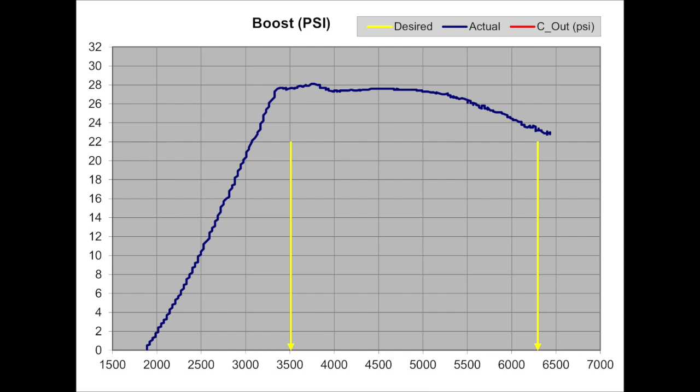So those are the software versions that I've put on my Mk7 GTI, and the data I've collected has been on the street - full throttle acceleration in third gear, starting around 2,000 to 2,500 RPM up to around 6,000 to 6,500. Recording engine variables like air-to-fuel ratio, timing, boost, and the vehicle's acceleration time, then using that information along with vehicle speed to calculate peak wheel horsepower using the virtual dyno application.

A couple things as far as the procedures go - I have a link explaining some of my use with virtual dyno. This go around, with the number of tunes I've used, I also did a comparison with the DynoJet when I recorded data there and found a really high correlation between the two.

As far as the street data goes and the amount of data I've been recording there, I did a short analysis to make sure I was getting sufficient data to be able to make a fairly conclusive comparison between these products.

So it wasn't just one pull on the street compared with another one. I ran enough to determine that for the threshold of difference I was interested in, which was a peak wheel horsepower of 7 wheel horsepower, at least 6 samples of each tune would be necessary.

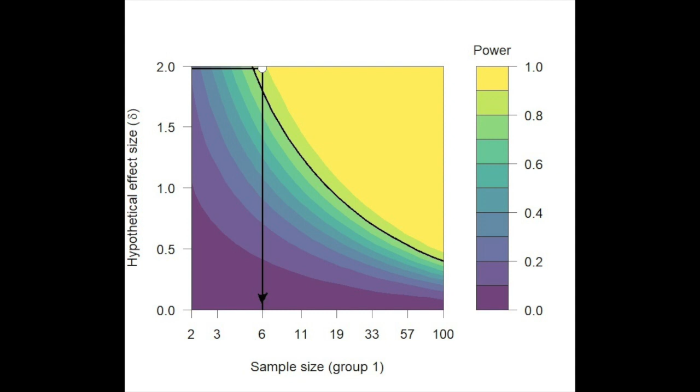I went well above that. I think the minimum I had was around a dozen, and for a couple of these tunes I've got about 20 plus pulls that I've done. Didn't use every single one of them, but that got enough to get some good data.

And then the one other thing I address in a separate section is some software I'm using that allows me to log variables from the engine that aren't accessible with the Cobb Accessport. That's the noise signal, the average noise level, which is basically just a moving average of the noise signal, and then the knock threshold, which is based on that moving average.

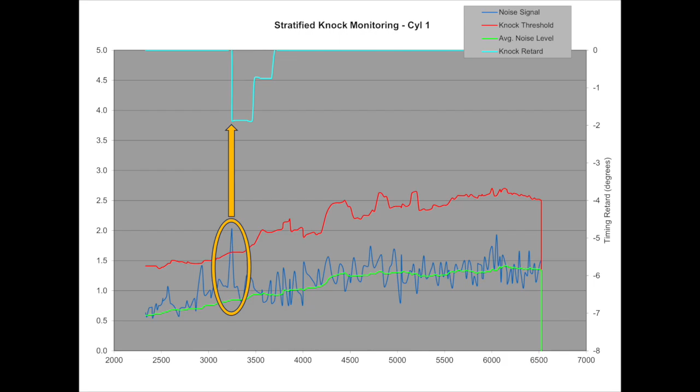It's multiplied by a gain factor and has an offset applied to it, and that determines this threshold. If the noise signal goes above that threshold, that's where the ECU determines a potential knock event has occurred and starts to take preventative measures to keep the engine safe.

That's something I've described on a separate page and would be worth your while to look at, because it's pretty insightful as far as the approach some tuners use to deliver the power you see, and the perception of what is safe and what's not.

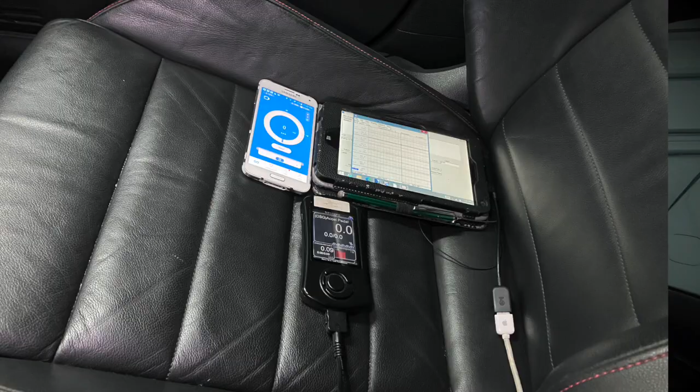So that's the background. As far as capturing the data, like I said, I successfully did that. It took several weeks to get through all the different tunes, getting enough data, having the right temperature conditions to keep things fair and even across the different tunes, making sure the temperatures were the same.

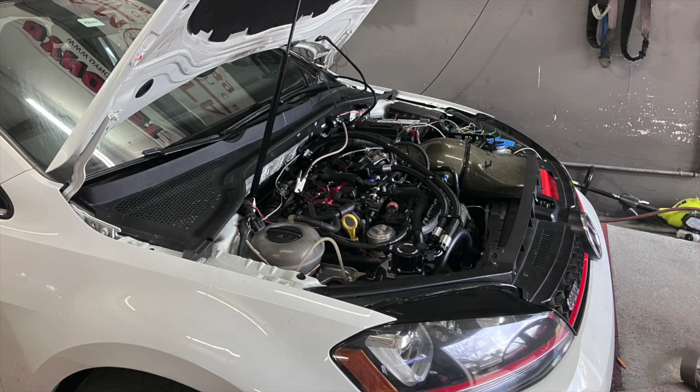On the dyno, that was all done in one day, a couple of hours, and temperatures stayed consistent that day. So that was a very successful dyno session.

All this information is contained on pages linked below. I've got one page set up with the individual tunes, the pulls I've done, and a sampling of how the variables like AFR, boost, etc. looked on multiple pulls for that particular tune.

I didn't put every single one of them because when you get like 20 different pulls, it just starts to become a mess of lines. So just enough to give a sense of that. I did that for each one, along with the DynoJet, or rather virtual Dyno estimated numbers.

There's another page that's got street data. That page contains all those individual tunes, their results aggregated into an average, and then comparing them - so you've got tune X compared with tune Y and tune Z, all on the same chart, showing the average value.

The intent there is to show trends between these tunes, just in general what you can expect from them. And there's also the estimates for the peak wheel horsepower, the acceleration times, etc., that type of stuff.

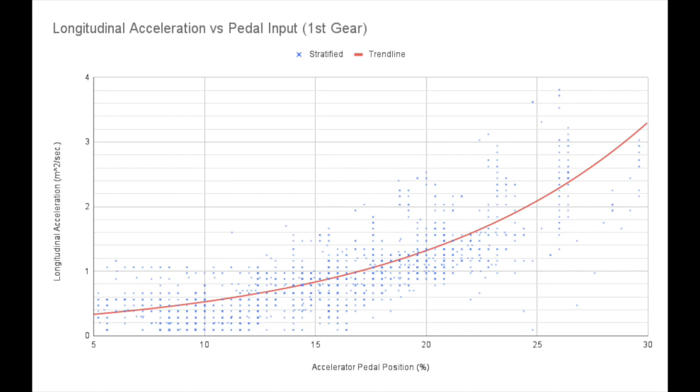There's also longitudinal acceleration, which is how rapidly the vehicle's accelerating. I've logged that versus the pedal position to give a sense of throttle response, how far you push the pedal, how much the car is accelerating, to show that for some of the different tunes, how that may compare. I only did that in first and second gear. I think at the higher gears, it's not as noticeable, so I just limited it to those two.

And then as far as the dyno goes, that's pretty straightforward. You get wheel horsepower and wheel torque, not much else to get from that.

With respect to the actual results, I think looking at the data is probably the best course, but I will go over it just to describe it. I think the intent of capturing this data was to allow people to make up their own mind about what seemed most suitable to them and what they liked. But I'll go ahead and give my thoughts on some of the things that I saw that maybe I wasn't expecting, things that confirmed things that I had suspicions about, etc., that type of stuff.

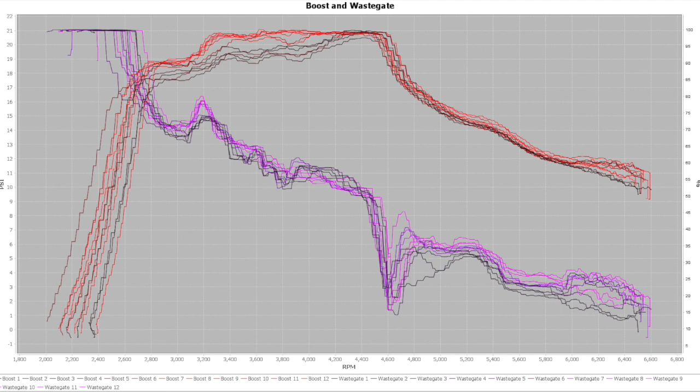So starting off with the stock tune, no real surprises there. Moderate power. I was a little bit surprised at how quickly the boost pressure drops off after around 4,000, 4,500 RPM. It really just plummets, which was slightly surprising to me. But aside from that, most of the rest of the stuff I saw from it was not all unexpected at all.

The Cobb Stage 2 tune was one that I really enjoyed getting the opportunity to log and compare those results with both stock as well as some of the popular aftermarket tunes, because the Cobb software has a pretty bad rap as far as I can tell.

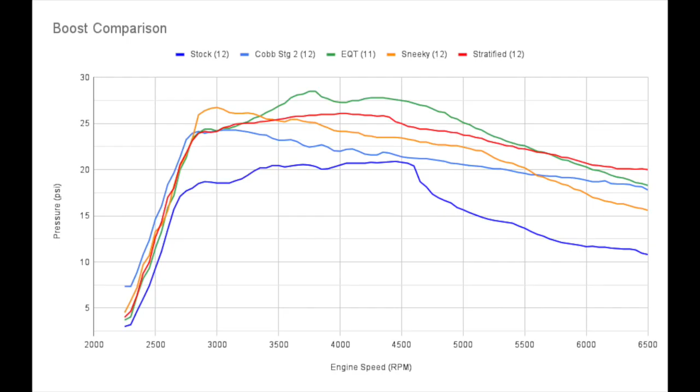And when you look at it from the perspective of what it is doing and what it delivers, I don't think it's deserved. In terms of power output, it is less than these aftermarket tunes, which is hardly surprising when you take a look at the boost curve. You see it dropping rapidly. Look at the timing. I think it has the least aggressive timing of any of the tunes out there.

And so when you see those types of things, then you hear it talked about as being trash and dangerous, going to ruin your engine if you use the Cobb tune. And you look at that and you say, okay, how's that happening when it's running relatively low boost and low timing?

That just doesn't add up. And then you throw in the new variable, which is the noise signal, noise level, thresholds, and all that. And you see that Cobb is running OEM safety measures. If you're talking safe, that's pretty much as safe as it's going to get. It's using what Volkswagen's built for this car.

And so this gets to that issue that I bring up with the Cobb Accessport reporting knock retard, which is very misleading, or potentially misleading, as I put it, because the knock value that the sensor is reading is processed prior to determining what the ignition retard is going to be. And that processing is subject to manipulation by software tuners.

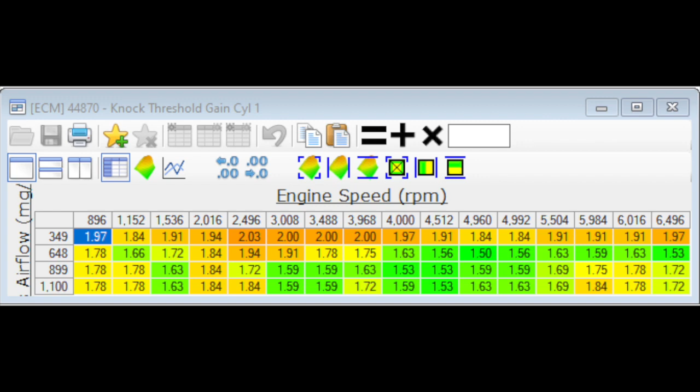So what you get for a knock retard value depends a lot on what the software tuner has done with values in the different tables that they can modify.

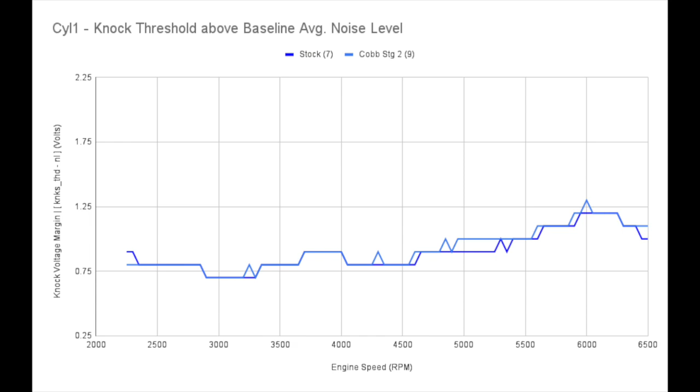And I've checked with Cobb, and they've stated they don't make any changes to the OEM software safety measures related to knock, which is evident because you can see that on some of the charts where I show the difference between stock and what Cobb is, the differences are pretty negligible, really just due to random variation of the fact that I'm logging information on the street and there's going to be some variation.

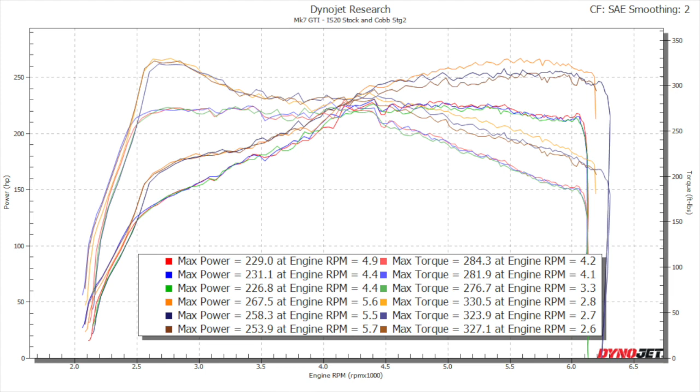So debunking the idea that the Cobb tune is going to be damaging in any way was a good outcome from this. And then I think it's somewhere in the neighborhood of 40 wheel horsepower of increased power compared to stock, which is not an insignificant amount. There's a lot of parts that you buy, intakes, inlet pipes, charge pipes, intercoolers, that would love to make a 40 wheel horsepower difference, and the Cobb Accessport provides that software along with it for no extra charge. So that's not really a bad return on the cost there.

So that was one of the big interesting bits that come out of this.

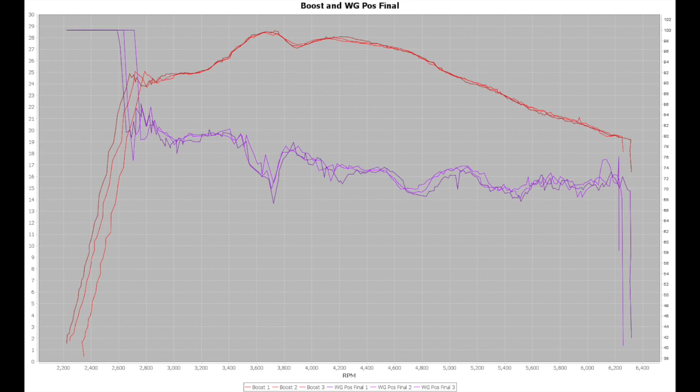Another tune that I looked at, I'll just kind of run through the tunes in the order that I have them listed, was Equilibrium Tuning's. I would say, as far as the data that I recorded, it was interesting. There wasn't anything that surprised me. I've heard that it runs a lot of boost, and sure enough, it runs a lot of boost. And there's a good amount of timing there as well. What I did find kind of interesting is that it has a reputation of running a lot of boost, a lot of timing, and it's very safe.

Because it doesn't have much knock retard. This is kind of like the opposite end of the spectrum from the Cobb. The reason it's not showing much knock retard is evident in the noise signal and noise threshold analysis, where you see that the company is bumping up the noise threshold.

That was interesting, it makes sense. People have made the point that it runs a lot of boost, quite a bit of timing, and is very safe. I don't see how you got to that conclusion, because those things really are incompatible. You don't run a lot of boost, a lot of timing, and make things more safe. That's just the nature of the game.

So that was another interesting conclusion from the data that was collected. The Sneeky tune, I hadn't had much exposure to it, I guess you could say, and I wasn't all that familiar with how it was going to work. So that was an interesting one to have some driving time with.

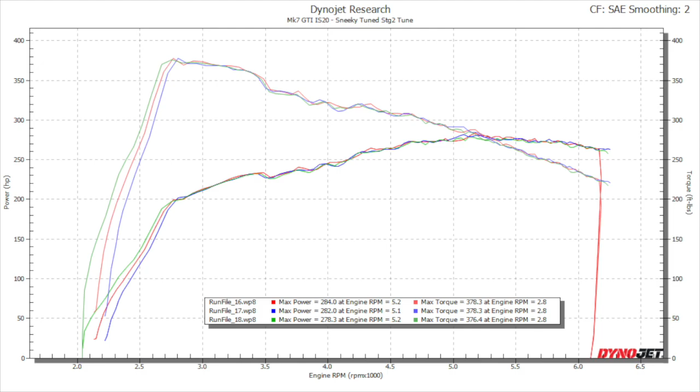A lot of torque on that one, and you definitely notice it. It's more noticeable than both the stratified and EQT tunes, the amount of torque the car produces, and that's reflected in the dyno as well, in the longitudinal acceleration data. You see that with boost pressure. That's pretty much what's happening there, as well as quite a bit of timing. At that engine speed, it's running the most boost and the most timing. So hey, surprise, it's got the most torque.

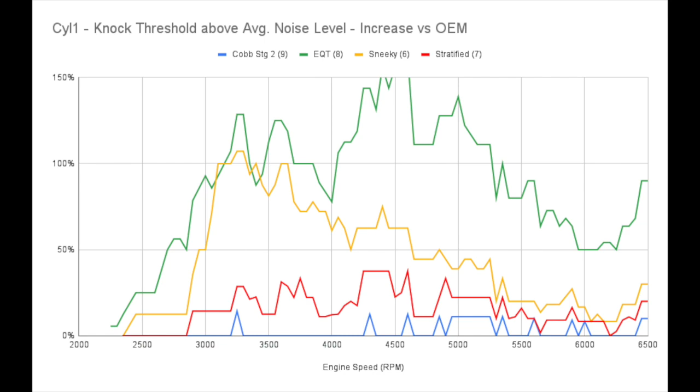Likewise, with the EQT tune, the Sneeky tune is showing that they're numbing the knock sensors in that range. I also found it interesting how much they dropped off the boost pressure with engine speed. Not that there's anything wrong with it, the car seems to drive fine. It was just interesting to see that they would taper the boost off as much as they had relative to the other two aftermarket tunes that I had looked at.

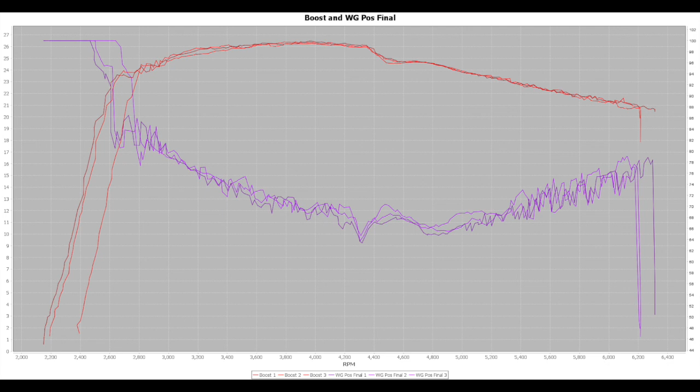Stratified was probably the least interesting to get data from, and by that I mean there was just nothing that really struck me as unusual. It runs more boost pressure than stock, not as much as some of the other tunes, and timing actually was not as advanced as I kind of thought it might be. Pretty moderate, but they managed to get a pretty good amount of power, the second highest power, not that far off from the lead of how much power is being produced. And the torque is down, which makes sense because of the amount of timing it's running early on.

But on the other hand, they're running pretty much the OEM knock safety measures.

So those are the results as far as my overall impression, and really what would I use for an off-the-shelf tune. That's probably the key point, is off-the-shelf. These tuners all offer custom tunes, and I limited this to off-the-shelf tunes. There are other tuners out there that do custom work, but I didn't see them offering off-the-shelf tunes, which is why they're not being compared.

But if you want to go custom, that opens up the possibilities of some other companies. To that point, if you're doing a custom tune, you as the customer are making decisions about what you want, what type of risks you're willing to take with your specific car for your goals. Whereas the off-the-shelf tune needs to be written for the average consumer who could have a wide range of goals. My assumption there is, if you're an average consumer and you want maximum power, well, you ought to be looking into a custom tune.